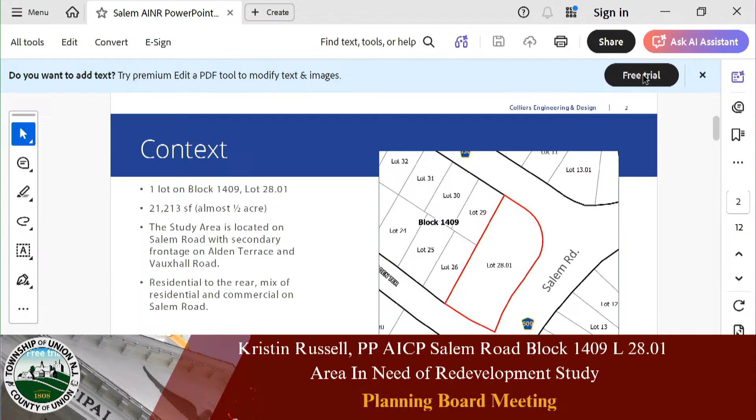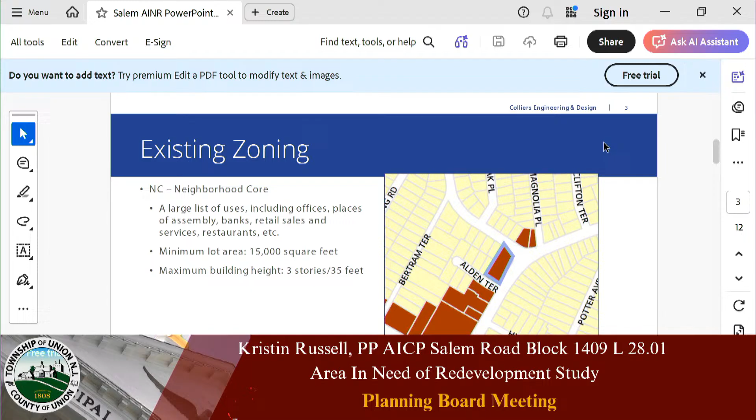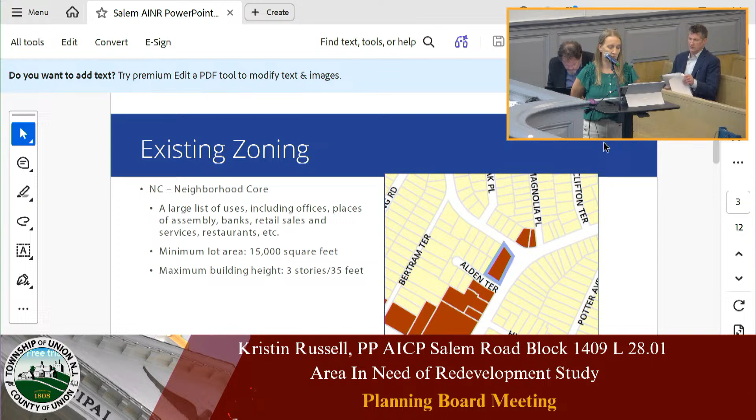The current zoning on the site is NC, Neighborhood Core, which allows an extensive list of commercial uses, including retail sales and services, restaurants, and the like. The minimum lot size in the NC zone is 15,000 square feet, and the maximum building height is 3 stories and 35 feet.

Once upon a time, the site had a gas station on it, and quite some time ago it was determined to be a known contaminated site. It did go through remediation, so it is safe for many uses. However, depending on what a future use might be, it may need continued remediation. For example, I wouldn't be surprised if a residential use needed more remediation, but that's up to the property owner at a future date. It is generally safe at this point in time.

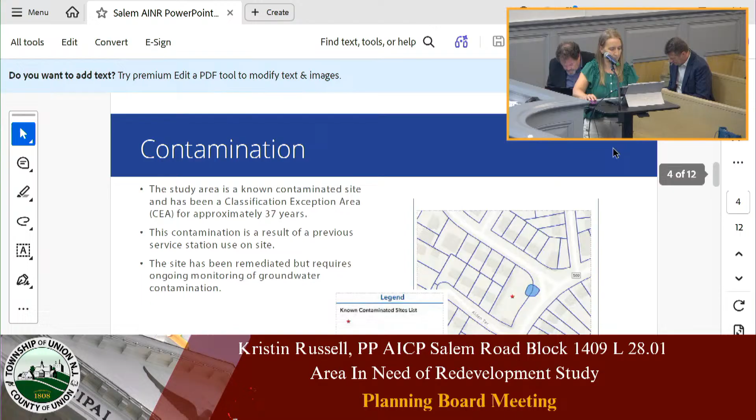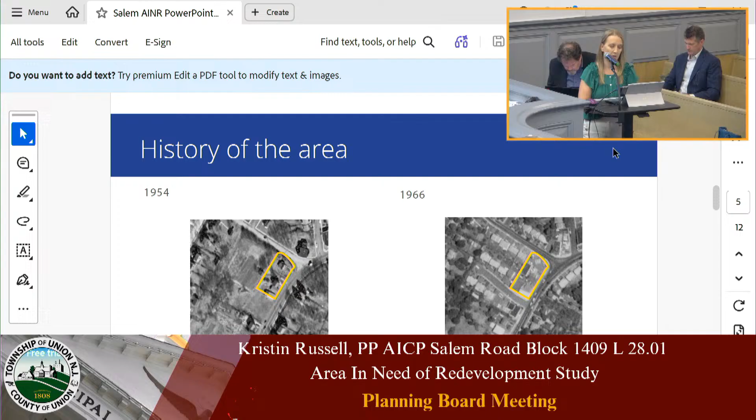Just some pictures to rather quickly go through the history of the area. Now that I'm looking at them on the screen, I hope that you can even see them. But what it shows is, even as early as 1954, there was development on that site in the form of several buildings. It was never just one big building occupying the site or one building and a parking lot; it was very often multiple structures. That makes sense with the former gas station use I mentioned. There would have probably been a garage use and a canopy for the fuel tanks and such. So as early as 1954, we find images to that effect, and that continues through pretty much through the present.

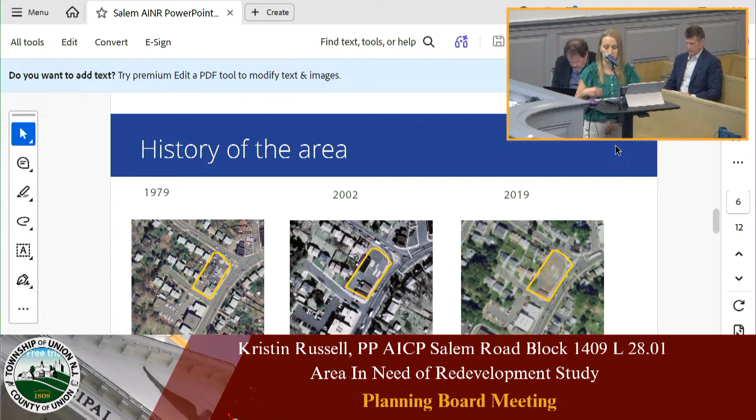You can see in 2019, that's the first image I found where the majority of the site is demolished, and that's how we would find it today. The majority of the site is just a gravel, vacant parking area — I wouldn't even call it a parking area, it's just a gravel, vacant, broken up asphalt type of site. Though at the southern side of the site, we do have a one-story building that also is vacant. There has not been a tenant in there for some time.

So just to run over the Local Redevelopment and Housing Law that you're all familiar with, there are a series of criteria that any site must meet one or several of in order to be qualified as an area in need of redevelopment. And I should have mentioned this at the top, this is a non-condemnation area in need study. So should the governing body choose to adopt this as a redevelopment area, they would not have the power of eminent domain.

So this site that I'm looking at, I compared it to all of the criteria that are available, and those that it qualified under are A, B, and D. A, in short, is substandard, unsafe, unsanitary, dilapidated, and obsolete buildings. B is buildings that were previously used for commercial, that have been abandoned for at least 2 consecutive years. And D, areas where the buildings or improvements are detrimental to the health, safety, and welfare of the community.

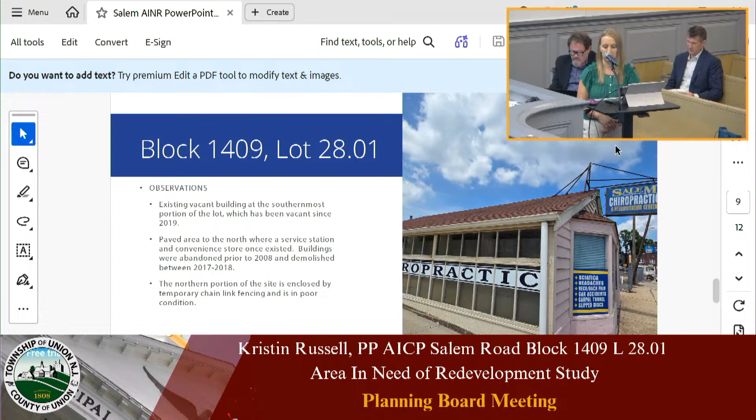So as I said, this is one lot. Here you can see a photograph of the building that's on the south side of the site. It's an existing building. It's been vacant since 2019, as far as I can find in the records. The paved area on the north side of the site was abandoned at some point prior to 2008 and demolished between 2017 and 2018. The northern portion of the site is enclosed by a temporary chain link fence that is in poor condition.

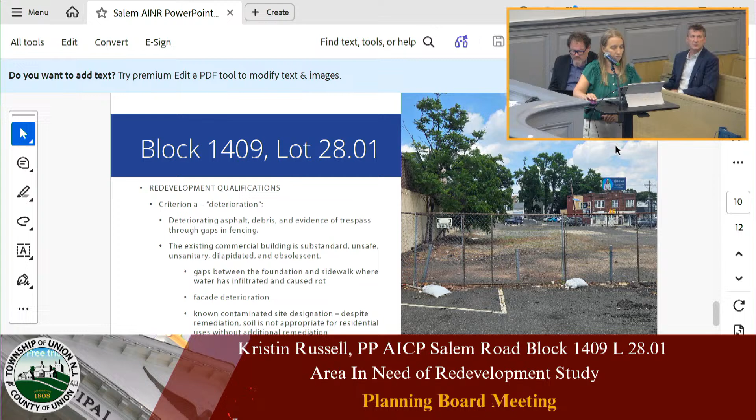Criterion B is where we look at the vacant and abandoned buildings. So this would not apply to the parking lot area of the site, but the remaining building on the property has been vacant since, as I said, at least 2019. We only need to show 2 years, so we are well within that range. And the building sitting there vacant has fallen into a state of disrepair and it would be untenable at this point.

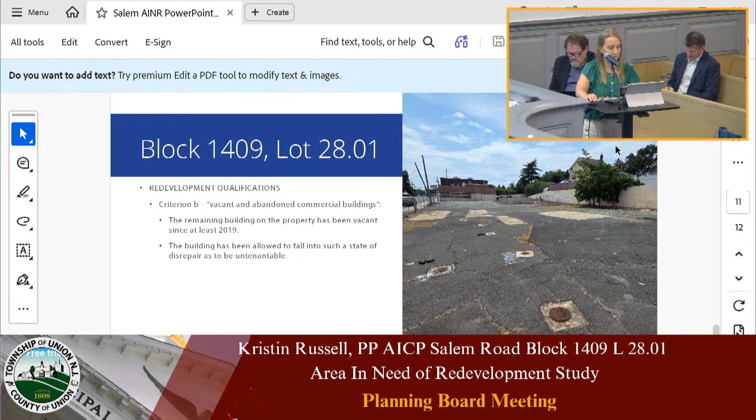Finally, criterion D is the obsolete layout and design. The side street that runs adjacent to that building has a slight grade, which doesn't seem like a lot until you look at it against the facade of that building and you realize that the building is consequently partially sunken into the grade. It's just not an ideal situation. So when the pedestrian is walking up the sidewalk, the windows are almost below them. It's pretty awkward. It wouldn't be an ideal situation for any business to be in there.

The existing zoning limits impervious coverage to 80%, and this site has 100% coverage. The corner location, 2 corners actually, is highly visible, and the existing conditions are an eyesore and detriment to the morals, economy, and vibrancy of the community. That would be a great block front to see some activity on, to see revitalization that would uplift that entire corridor. The building and the site present safety hazards, as I said, deteriorating

Deteriorating asphalt, deteriorating facade, and the site's existing limitations have caused the decay of the block front, which impacts the broader community. So I've listed 3 criteria that this site, I believe, qualifies for under the local redevelopment and housing law. You only need 1. So 3 gives us really an extra boost in confidence that this site would qualify.

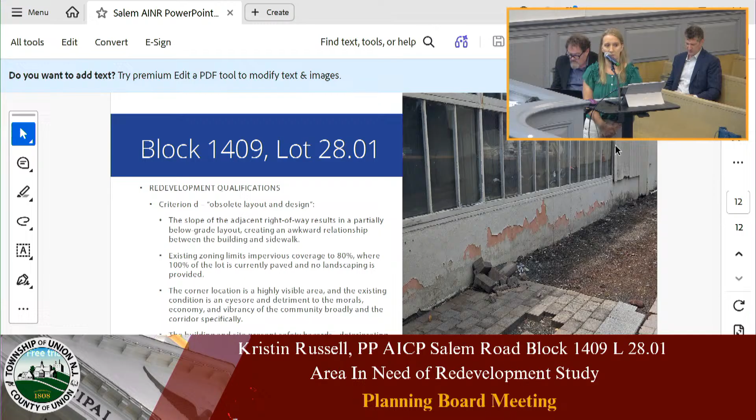I'd like to take any questions about the site, but just as a reminder, the next steps in this process would be to send a recommendation to the Township Committee, and they would then, if they agree with you, adopt a resolution determining that this is an area in need of redevelopment. And then at some point in the future, a redevelopment plan could be written for this site.

Thank you. Questions from the board? Questions from the public? Okay. Comments from the board, if there's any comments? Comments from the public?

Okay, with that, can I get a motion to concur with the findings and recommendations of the study and refer this back to the Township Committee for further action? So moved. Moved by Mr. Cohan. Is there a second? Second. Seconded by Mrs. Perkins. Roll call, please.

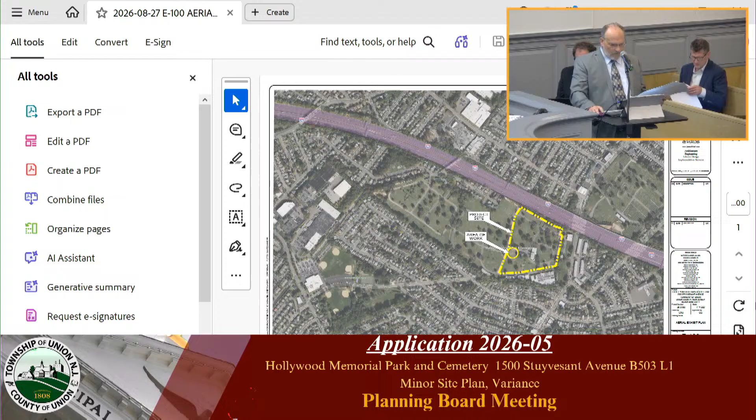Let's see, I am going to switch to second exhibit. Oops, that's not it. Apologize. There it is. Again.

Okay, this would be the second exhibit, dated August 27th, 2026, drawing E200, simply titled Site Exhibit Plan. It's basically a color version of our site plans, and it also includes the zoning table on it.

The applicant is proposing an 8,160 square foot mausoleum building, represented by the tan color on the exhibit. The mausoleum building is encompassed by a walkway, and the roof overhangs, with columns along the edge of the walkway so the roof covers that walkway. The total roof area is 10,223 square feet.

I'm going to go to the rendering. Is that exhibit A2? A2, yes. Thank you, counsel. Just to talk a little about the building itself. I don't know, Steve, if this was part of the package submitted. Why don't we mark that as A3? Okay, yeah, this is a colored rendering of the proposed mausoleum.

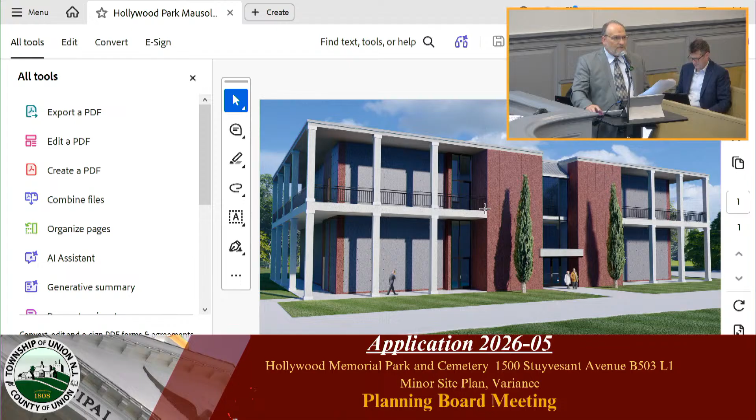The building will be constructed of reinforced concrete, with granite on the exterior and marble interior. It will have heat and air conditioning and is also equipped with an elevator. This mausoleum will accommodate 2,572 crypts. So just going back to Exhibit A2.

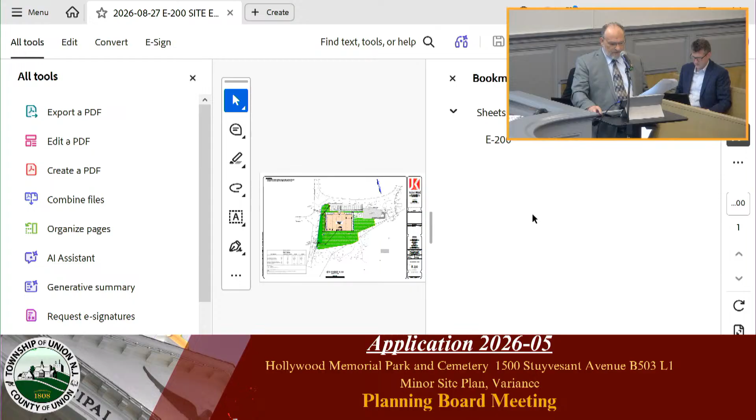There it is. Some additional site work, ancillary work in addition to the building. There's going to be 10 parking spaces constructed in front off the existing circulation road, asphalt paved parking spaces. There'll be some site grading, minimal landscaping, a few trees are proposed. The building will require new utility services, and we're also proposing a stormwater management system, which is to the west of the proposed building.

Staying on the stormwater, this site, under the newest New Jersey rules and regulations for stormwater management, falls into the category of a major stormwater development simply because we are introducing more than 1/4 of an acre of new impervious area. That kicks us into having to address water quantity, water quality, and groundwater recharge.

For water quantity, for a major development, we have to compare existing peak flows from our area of disturbance and provide a system that can attenuate those flows so that the developed peak flows are 50%, 75%, or 80% of the 2, 10, and 100-year storm values, respectively, for the existing conditions peak flow.

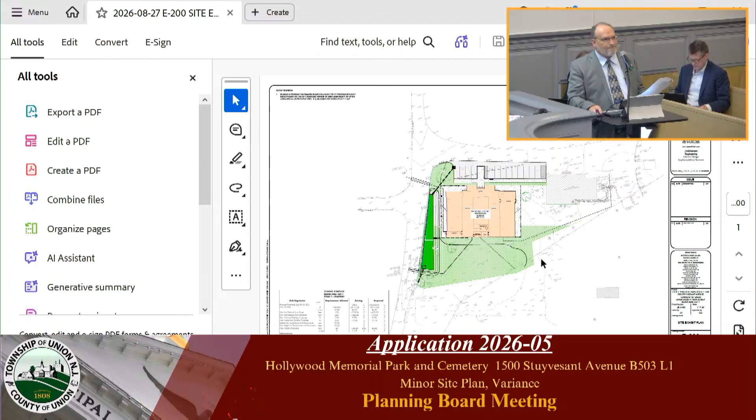You've had an opportunity to review the August 11, 2026 letter from Colliers. Can you confirm you don't have any concerns or issues with the items raised? Yes, we had that letter. The plans we resubmitted address all the technical items. There are some administrative items, such as cost estimates and a couple of outside agency approvals, which we'll obtain should the board vote favorably on this application.

Thank you very much. Mr. Chairman, I have no further questions of Mr. Cesario. Questions from the board?

Is that a sprinklered building? We can confirm, if it's required, it certainly will be. I don't believe it is, but I'm not 100% sure. I've been in those buildings so many times, I'm trying to remember if I looked up at the ceiling. Again, if required, it certainly will have it. Doctor, just a question or remark.

In the technical comments, item 6 talks about the recommended 4-inch sewer line to the new building to avoid the 90-degree turns, as a recommendation. Yes, the current plans before the board address that. We believe we've taken care of all the technical comments, but I defer to the board's professionals.

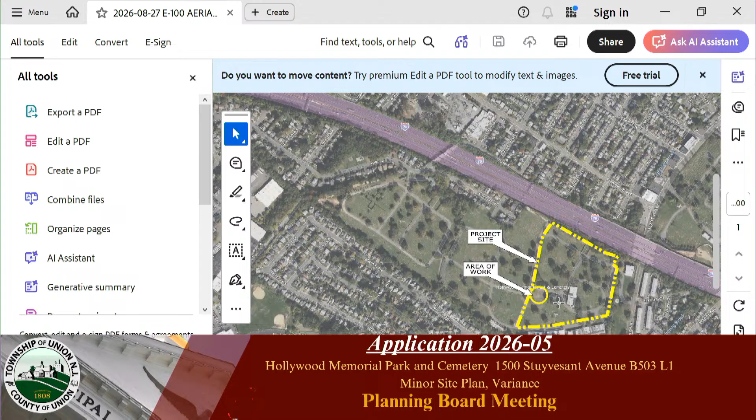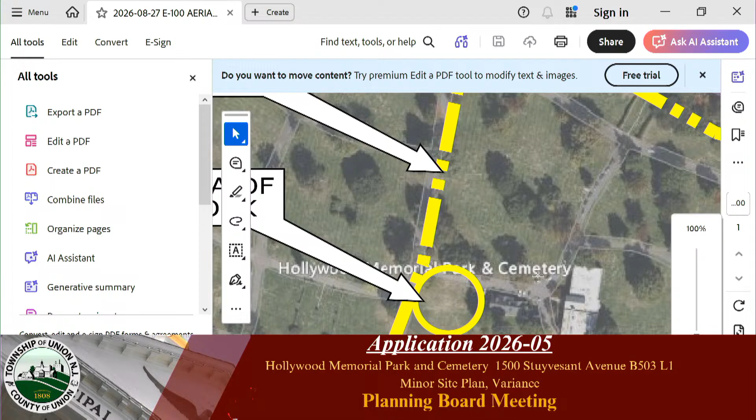Where is the existing parking in relationship to the buildings? It seems like there should be a site plan showing everything, but it doesn't look like you have that right now, so that's okay. Let's go to the survey instead.

This square represents where the new building is going, and this is the existing building just to the right. Oh okay, now that's helpful.

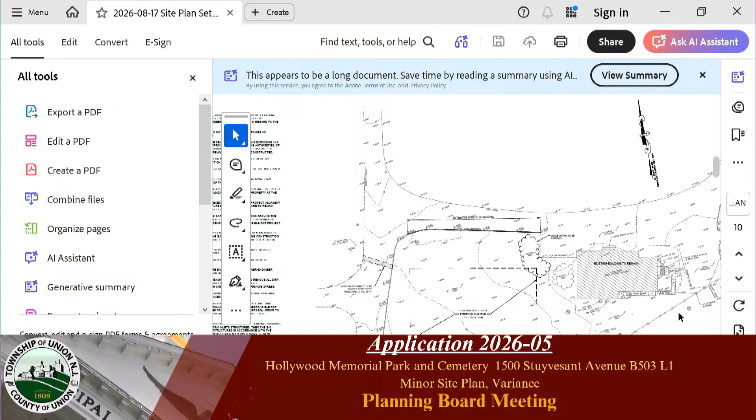Where is the site entry? To the east, off Stuyvesant Avenue. Oh, Stuyvesant, okay. That kind of answers my question a little bit.

Could you bring up the rendering briefly? Sure. I was talking about the three-dimensional rendering. Oh, the exterior of the building, architect... I'm sorry.

You said the materials were a concrete building with granite, I would imagine the red areas are the granite? That is my understanding. Just for clarity, I am not the architect on the project.

Understood. It looks like the bottom massing is higher than the upper massing? I would have to look at the elevation. Okay, alright, so I'm not going to ask any more architectural questions, that's fine.

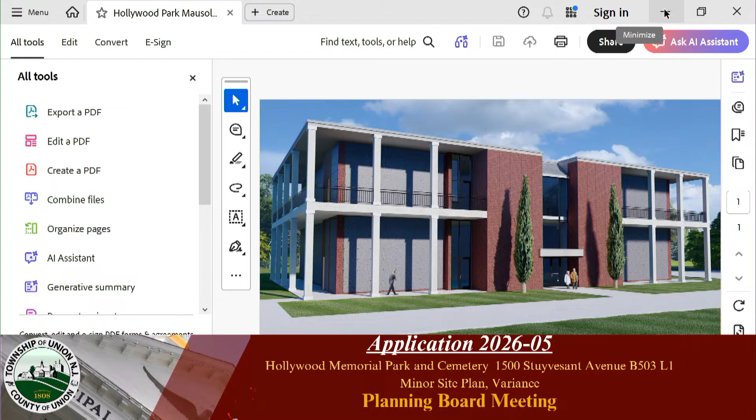The last one is, what are the parking requirements in relationship to what you're providing? We did not see parking requirements specific to mausoleums, so it's kind of based on what the operator said.

I find myself, unfortunately, when I've had to go there, parking in the roadway. The entryway roadway is a little bit challenging. That might be something you want to look at, for convenience, not necessarily a requirement, but that's it. Okay, great, thanks, thank you.

Any further questions from the public? Okay, Mr. Hale? Yes, thanks Chair. I'd now like to call upon Robert Hudak, our professional planner.

Mr. Hudak, raise your right hand. Do you swear the testimony you're about to give is the truth, the whole truth, and nothing but the truth? I do. Please spell your last name for the record. Robert, last name Hudak, H-U-D as in David, A-K. I'm a licensed professional planner, my licenses are all in order. I have been before this board before and accepted as a witness, but if you want to go through my CV, we certainly can. Board stipulates. Okay great, thank you very much.

Mr. Hudak, based upon our submission, this is a permitted use in the zone, and we're seeking a C variance for the height. If you could please provide the planning justification for that relief.

Sure. As the board's aware, but for the edification of the public, variances can be granted under two standards. The first is the C1 hardship standard, where relief may be granted due to exceptional narrowness, shallowness, shape, or topographical feature uniquely affecting the property, creating practical difficulties in complying with the ordinance. There's also the C2, the flexible C standard, where relief may be granted where the purposes of the Municipal Land Use Law would be advanced, where benefits substantially outweigh detriments, and where the project offers a better zoning alternative.

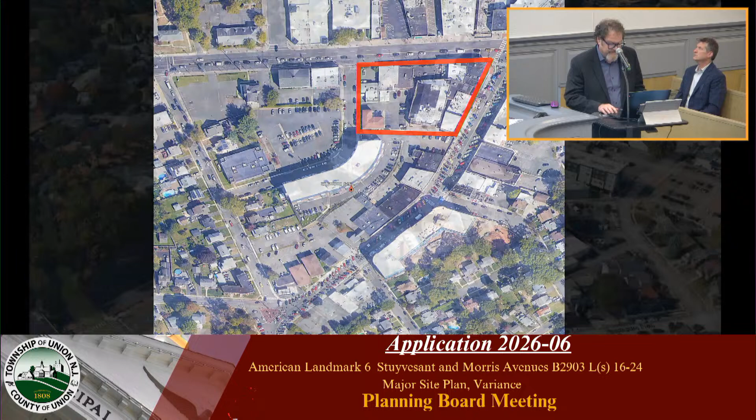This is a Google Earth view of the site. This shows the project as it's been constructed so far. It also shows something very unique in this image: how Morris Avenue necks down as you head west. It's wider in front of Town Hall, and then it narrows at Stuyvesant Avenue, creating a very interesting perspective. As people come into town on Morris Avenue approaching the intersection of Stuyvesant, you can see clearly this site projects into the visual corridor of Morris Avenue. So, no pun intended, we think this is a landmark site.

We began working on this project in 2022, and we first studied a lot of different development options. In our early meetings with the developer and the town, it became apparent that this site was very special because of its town center location and the condition I just explained. We thought this would create a great location for destinations for shopping, restaurants, and public gathering spaces. When we looked at it, a traditional development pattern of a full block development on this site wouldn't be the best use of this location.

This is one of the early concept studies that we talked about with the town professionals and with our team. This study shows that by pulling back the building from Stuyvesant Avenue and from Morris Avenue, we could create a public space at the intersection, so that public space could become the primary focus of this project.

We also looked at it, and the developer modified their Phase 4 building so that it now turns to front on the plaza space. We thought that was very important. One of the great things about European plazas, and plazas in general, is when they're held together by the architecture of the buildings around them. So by turning the Phase 4 building and creating a front on this plaza, it captures the space and also hides the parking located behind the Phase 4 building.

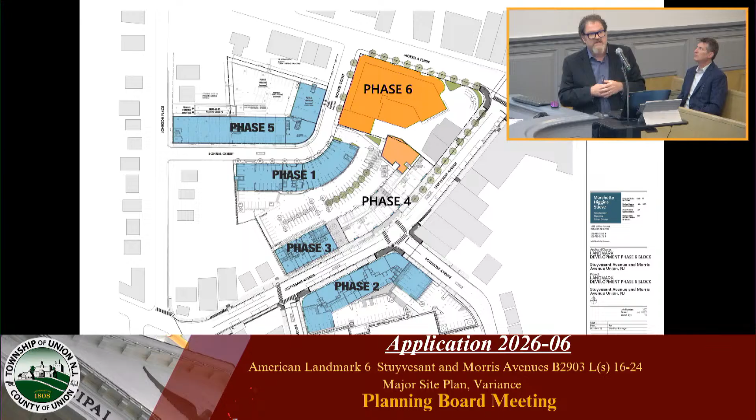It also creates a very unique opportunity to allow pedestrians to funnel through the plaza space and through a newly generated mews that leads directly to the public parking facility created in the Phase 5 building. So now people who park in the Phase 5 project can walk through the mews and actually enter into the plaza space.

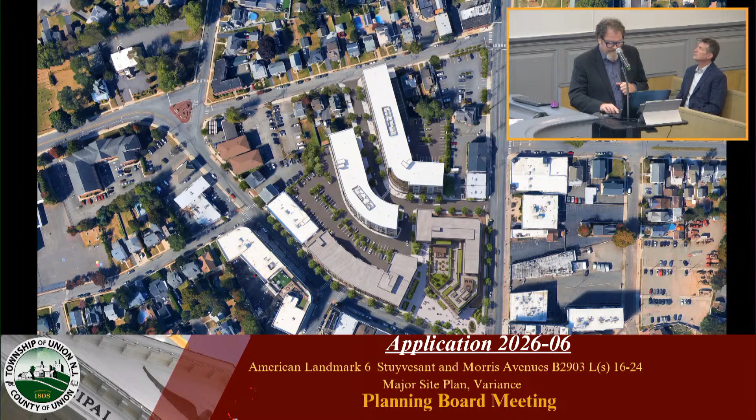This is a rendered image of the intersection of Stuyvesant and Morris Avenue. This shows the plaza in front of the building. It shows the building form, how it's turned and creates a frontage on the plaza, and then the Phase 6 building in the foreground.

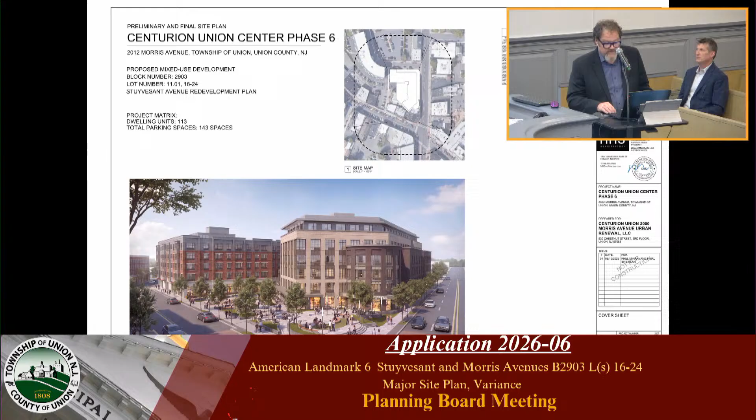Tonight we're seeking preliminary and final site plan approval for the Phase 6 project. The project is located in the Stuyvesant Avenue redevelopment plan, and it has been designed to comply with the requirements of this plan. We're seeking a few minor deviations or waivers, which we'll discuss as we move through the testimony. As was mentioned, the project will contain 113 residential units, 143 parking spaces, 10,000 square feet of retail space, and over 24,000 square feet of open space.

The project will have, as I mentioned, 143 parking spaces. Some of those will be located in a basement level of parking. In working through the design of the building, we made great efforts to hold the excavation of the basement back from the street frontages so that we could ensure we weren't excavating right up to the sidewalks with deep excavations.

In the parking breakdown, there are 113 parking spaces required by the redevelopment plan, and we're providing 143 parking spaces. 51 of those are going to be located on the basement level, 40 are located on the ground floor, and 52 will be located on a second floor.

We do have 24 compact spaces, and we are asking for a waiver for these compact spaces. These compact spaces measure 7.5 by 16 feet. It is my experience in many multifamily residential buildings that a percentage of compact spaces are adequate and service smaller vehicles. All of the parking spaces in this project are going to be assigned, so tenants will be assigned a parking spot, and building management will be sure that compact spaces get assigned to people with compact cars.

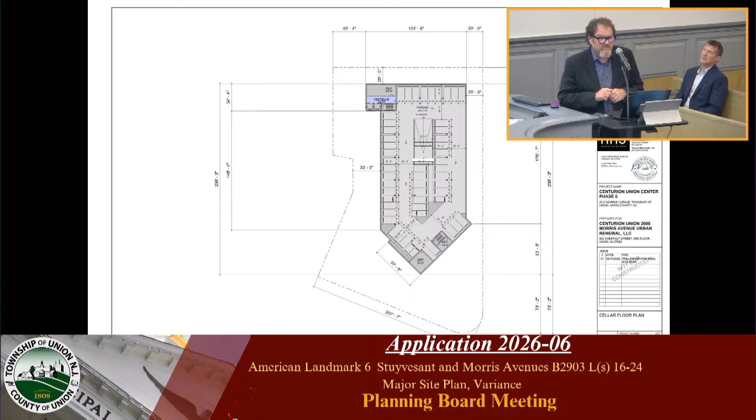15% of the parking spaces in the parking garage are also required to be EV charging spaces. This is a requirement by the state. We received a review letter from your fire department, and they requested that if the parking spaces were to be located in the building, we would need to provide a more robust sprinkler system, and that we should make an effort to have all of the parking spaces located on the ground floor, as near to the garage access as possible, and we would be able to accommodate that.

We made sure, and you'll see in the elevation portion of the building, that the parking is treated just the same as the rest of the building, so it will be indistinguishable from the residential and retail portions of the building.

There is a trash and move-in location, and a loading zone that we're proposing in front of the building on Bonnell Court. Trash will be collected inside the building and stored inside the building, and will be brought out on collection days by building management. It'll be picked up by a private hauler and taken away, so there won't be any trash stored on the street. It'll all be contained inside the building.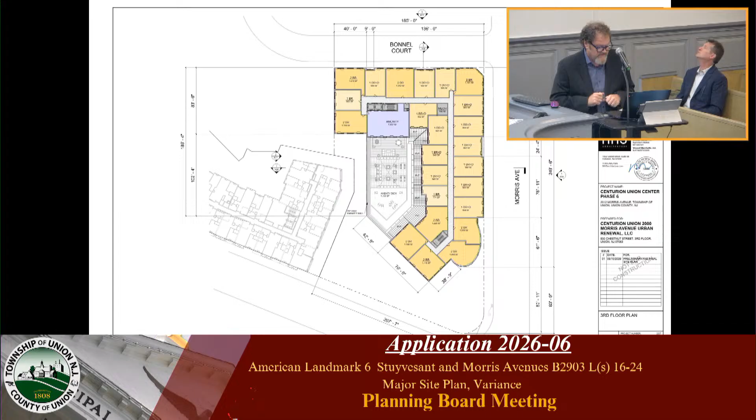The entire building is also going to be sprinklered, with an NFPA 13 sprinkler system. We've worked on a few other projects in Union, and all of those projects also have these types of facilities.

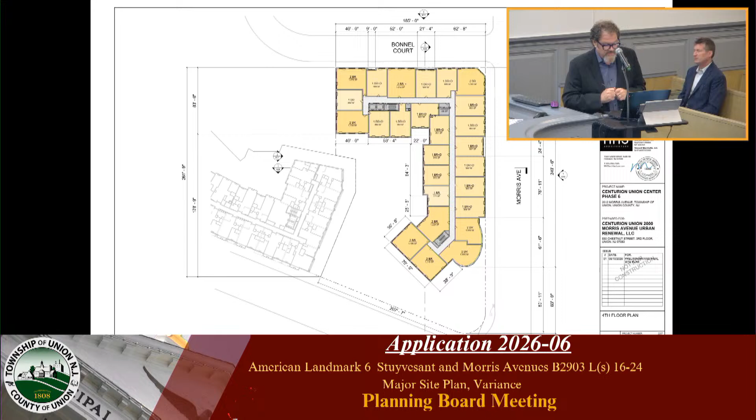This is the third floor plan again. I just show this to show how the units are located both front and back of the hallway. They face the street frontage as well as the plaza space. We meet all of the life safety requirements with regard to egress, and we have mechanical spaces on each floor off the corridor spaces.

As the building gets taller, there are significant step backs, prescribed in the redevelopment plan. At this floor level, there's a 12-foot setback along Morris Avenue and a 12-foot setback for the majority of Bonnel Court. This helps adjust the building height to the scale of the neighboring properties. At the sixth floor, there's an additional setback along Morris Avenue and Bonnel of 6 additional feet.

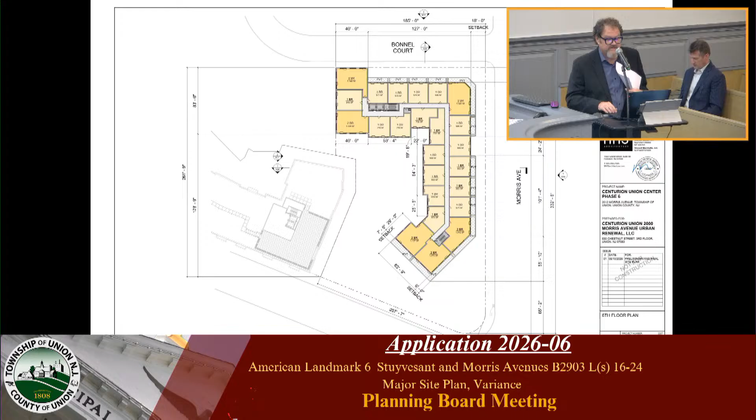Another waiver that we're going to be requesting is in the amount of green roof. The area provided on the green roof that we are showing right now is approximately 1,500 square feet of roof area.

It doesn't meet the minimum standards of the redevelopment plan.

However, this building is also going to be providing a series of other green features. The building will be using all low-flow plumbing fixtures. It will contain LED lights, energy-saving LED light fixtures, Energy Star rated appliances. It will be using low VOC paints and finishes, and locally sourced materials that contain higher recycling content.

In addition, there's a significant stormwater system that's being proposed, and we're providing a very significant amount of landscaping in the public plaza space, and you'll see that again when our landscape architect does his testimony.

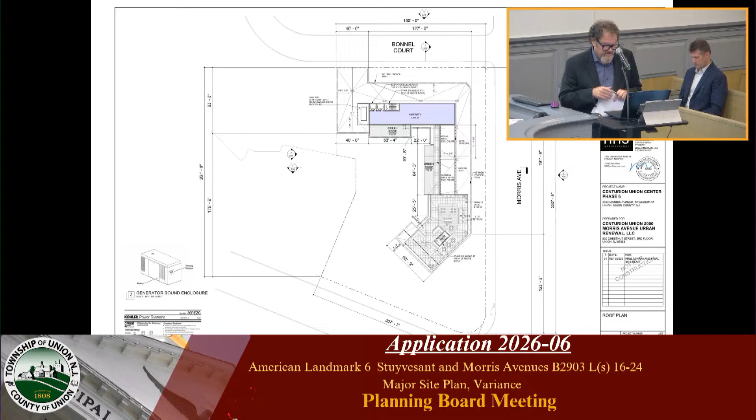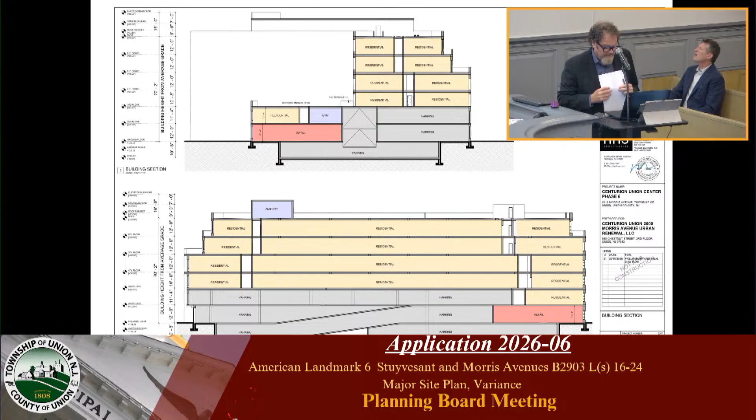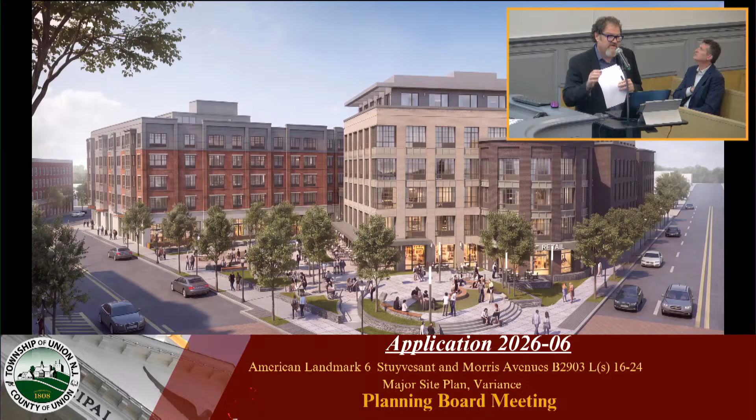So this is, again, the rendered building facade. I show that so you can see those step backs along Morris Avenue. These are the building elevations.

So the redevelopment plan has very robust design standards that we're required to follow. This project has been designed to comply with all of the design standards set forth in the redevelopment plan. It meets the required floor-to-floor heights and the facade material requirements by providing a variety of materials and openings across the facade.

The parking facades have been designed to blend with the residential portion of the building. The building has been designed to break up in massing using visual breaks both vertically and horizontally. It has a base, a middle, and a top. It meets the transparency requirements of the redevelopment plan at the base and the top of the building, and all of the entry points have been highlighted to stand out on the building facades.

The primary building facade materials are masonry, brick. There are two colors of brick being proposed. There'll be a panel system at the top of the building, so the materials get lighter as you go up.

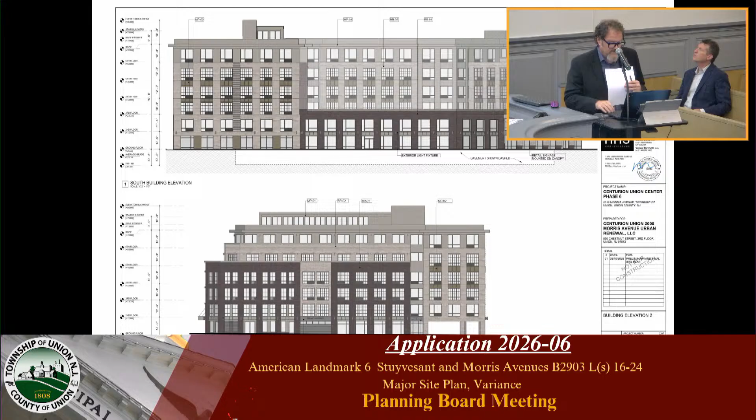The real intent of the signage is that it be consistent across the building. We want it to create a harmonious environment. It'll be pin-mounted channel letters that will be backlit or halo lit. There won't be any internally illuminated signage. Again, the intention is that it be a uniform sign package for the entire project.

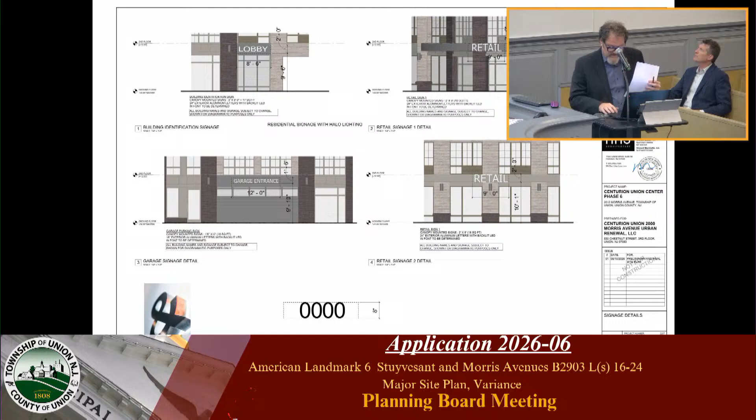And that concludes my testimony.

Well, great job, Mr. Stevie. No further questions at this time, Mr. Chairman? Questions from the board? Dr. Cowley?

So on the Morris Avenue side, the EV parking would be located in that side? It would be located on the ground floor plan.

If I can, I'll just quickly go back. We diagrammed before we had the fire department memo. We had the EV spaces broadcast throughout the building. We would revise our plan to show all of the parking for the EV on the ground floor level as close to the entrance to the garage as possible. I think that's a request we often get now about EV charging stations.

So because the parking lot area looks like the residential area, it seems almost closed off.

What would that look like in order to make it not a first floor closed off indoor environment?

Sure. So we're proposing to put a window system in, similar to the retail windows that we're putting in across the base of the building. One of the requirements of the redevelopment plan is if we're going to have parking that's exposed, it needs to be treated exactly the same way as the rest of the building. So there'll be a window system installed. The windows would probably have a tint to them, so you can't see the vehicles, but it'll appear as if that's a continuation of the storefront from the plaza space.

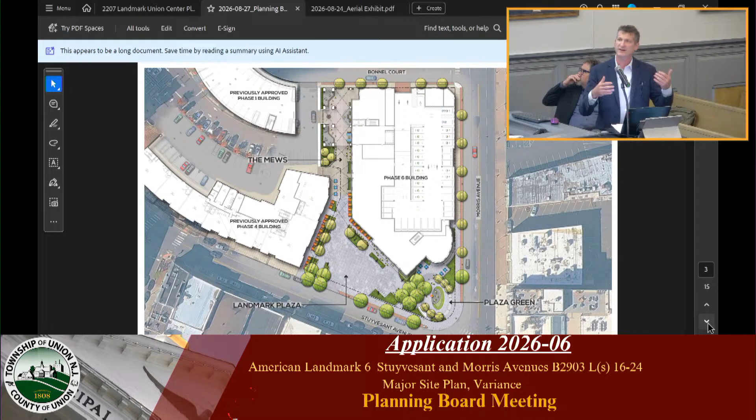All the trees are located to respect the proposed existing streetlights, and central to the project, and really the heart of this Phase 6 is the plaza itself. We've designed it as a singular space, but also creating some sub areas within there. At the intersection of Morris and Stuyvesant, there's the plaza green, a more lush planted area, and then we have the landmark plaza, which is a bit more open, creating the ability to be more flexible and provide opportunities for special events that the public will really be able to enjoy. We also have a retail frontage, a 10-foot zone off of the building facade in keeping with the redevelopment plan designated for that retail area, and then the Mews as it makes its way back to the parking garage and to Bonnel Court.

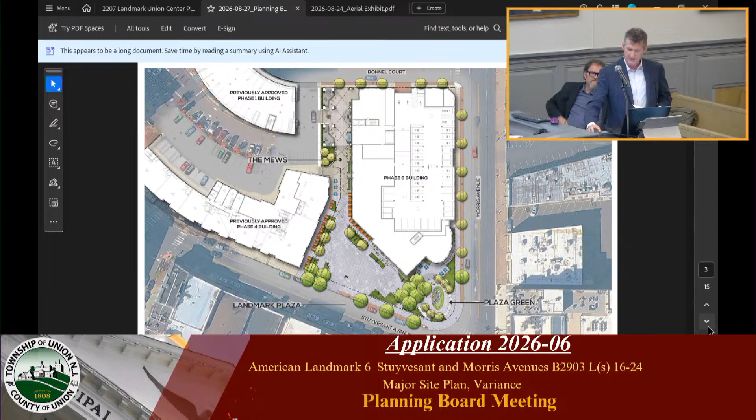I'm going to move to the next exhibit, which is the one plan I'll share this evening that is actually one of the submitted plans within the August 10th, 2026 landscape plan set. This is a compliance plan that shows the various aspects within the redevelopment plan and how we are complying with them from a landscape perspective.

The first item is the street tree placing. Along Bonnel, the requirement along Bonnel Court is for the trees to be planted 30 foot on center, and we are proposing that. That rhythm moves along and is flanked on either side of the parking garage entry, where naturally a tree cannot be located. There is also a requirement to have 1 lineal foot of seating for every 30 square foot within the plaza, so the recommendation for that would be...

666 lineal feet of seating area, and we're exceeding that with 697 lineal feet. This graphic shows how we've highlighted areas in yellow and orange — those are all of the proposed seating elements towards that requirement. You'll note that along the retail frontage, we show cafe seating that would really be by the tenant of the establishment within that retail use, and we're not utilizing any of that seating towards the requirement, so we meet the requirement as it would be for all public seating areas.

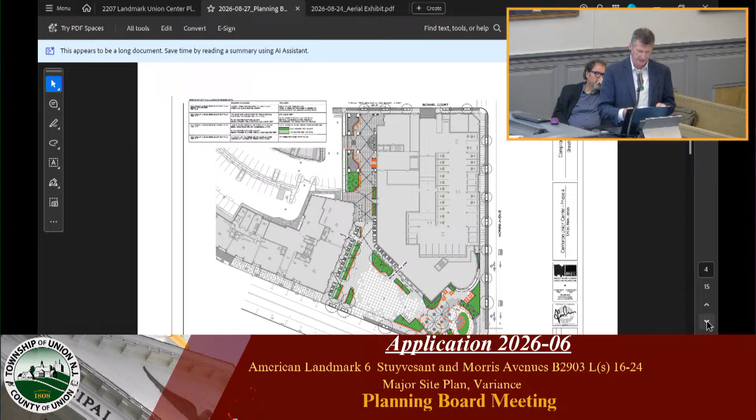Another requirement is that 20% of the plaza be planted, and we're exceeding that requirement with 4,346 square feet, identified within the 2 shades of green shown here. The last requirement we're tracking is to have a minimum of 18 trees within the plaza itself, and we're proposing 19 — again, that does not include any of the street trees along the 3 frontages.

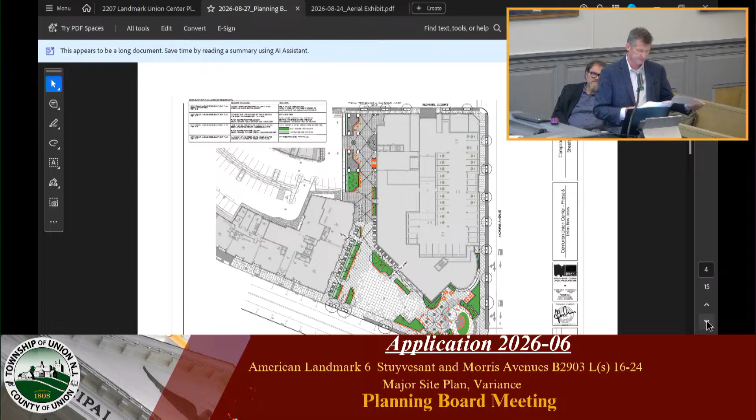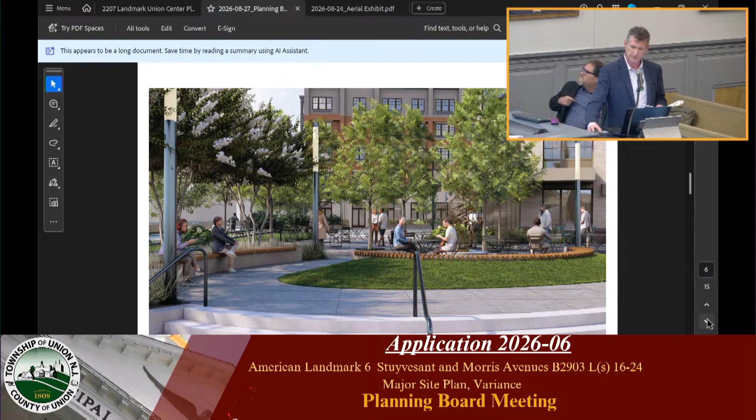Now our back is to Stuyvesant, and on the left side of the image is the previously approved building, where there is that retail zone, with some tables and chairs that would be per the retail tenant, a planter, and some trees, with cafe string lights as well for some ornamentation within that retail zone.

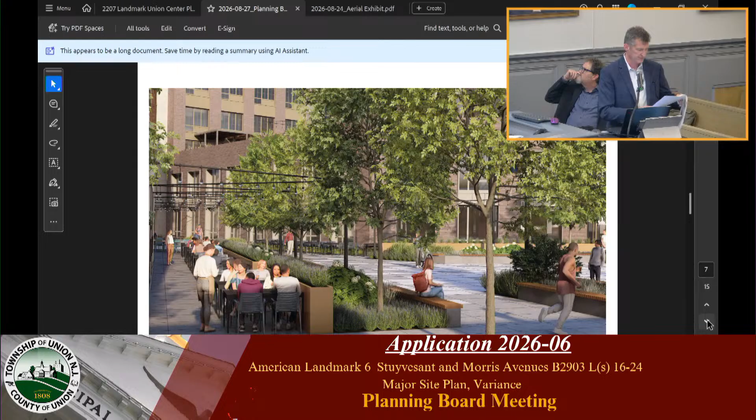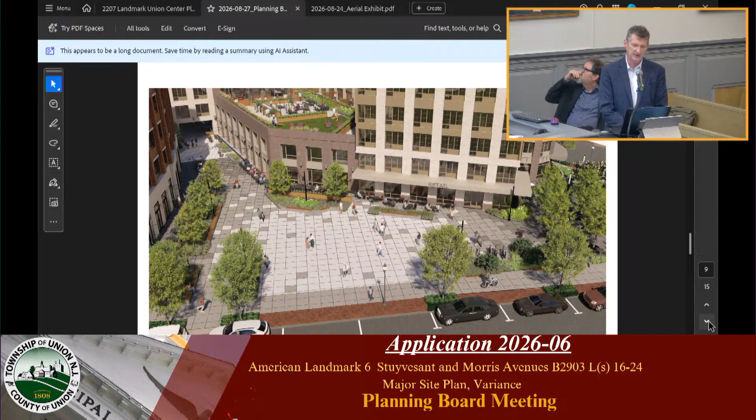This is a great view that I personally really like, looking down at the central space of the plaza. We have that Plaza Green off to the right-hand side, and then the retail zones creating those boundaries. We're also beginning to see the third floor retail and residential amenity space up top, but this plaza itself has been designed to be open so it can afford the opportunity for many different events.

This image shows how some of those events could happen. As Mr. Stevie indicated, in the upper left we're showing where the car show could be, where some of the best-in-class cars may be parked within the plaza. The center image could be for an evening concert, where a stage could be put up with approximately 200 chairs set out. Potentially a holiday market in the upper right, a farmer's market in the lower left, and potential for a food truck festival as well. So the plaza really offers some great opportunities for the public to enjoy this space.

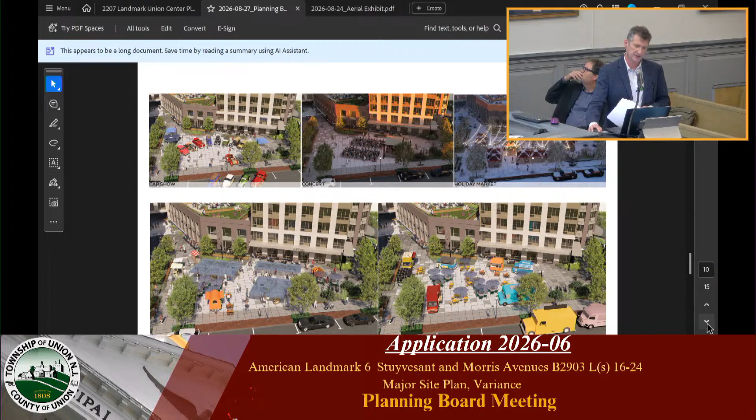Now I'm going back to a composite graphic where we show the plaza down below, the third floor rooftop amenity space, and overall the uppermost roof. So I'm going to take you now to that third floor, right off of that interior amenity space.

In the image in the upper right, our back is to that interior amenity club room, where we have a shade trellis creating some shade for table and chair seating. We have a fire pit in this area with lounge seating around it, two barbecue grills, and a synthetic lawn area that can be used for many different things, such as outdoor gaming like cornhole, as set up in the lower right-hand image.

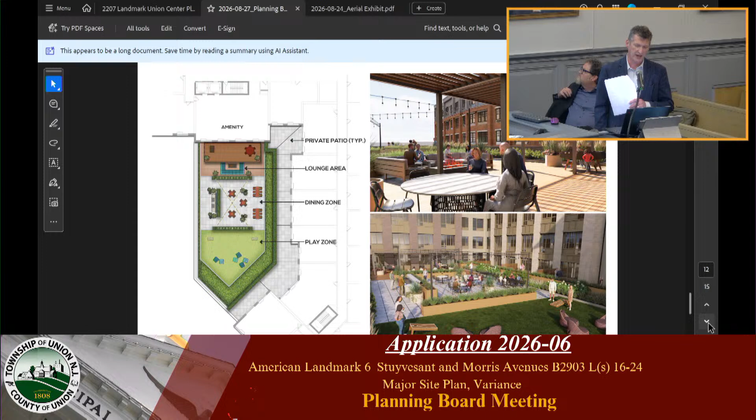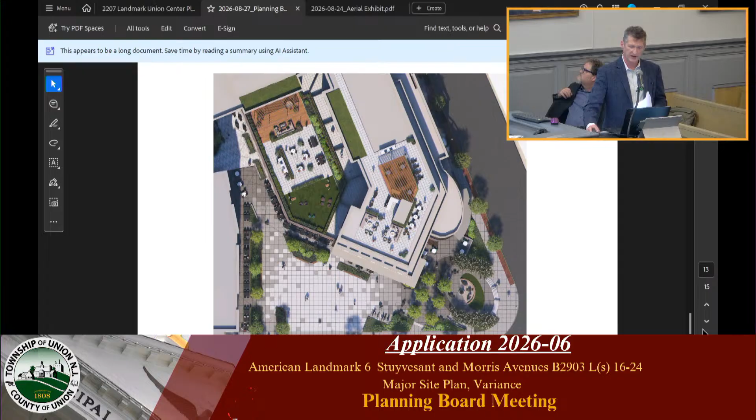That composite graphic again, just to orient you, we're moving up to the uppermost rooftop. On this rooftop we're proposing again a fire pit, two barbecue grills, a shade trellis up there as well, some lounge seating, and a counter with an outdoor TV located on that stair tower. This is accessed off of the interior amenity space toward the top of the plan, and this overlooks the plaza below.

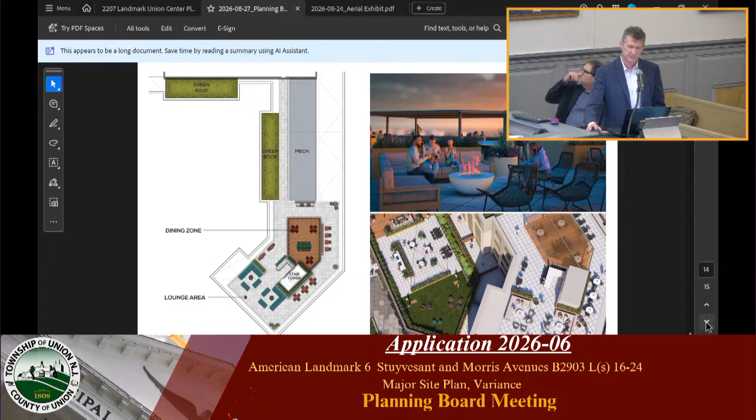This is the last image I have, and all the planting has been selected for sun and shade exposures. All of it would be irrigated, and as you heard from Mr. Stevie, the rooftop amenities, fire pit and barbecue grills, are all code compliant with countdown timers and such. That concludes my overview of the landscape improvements.

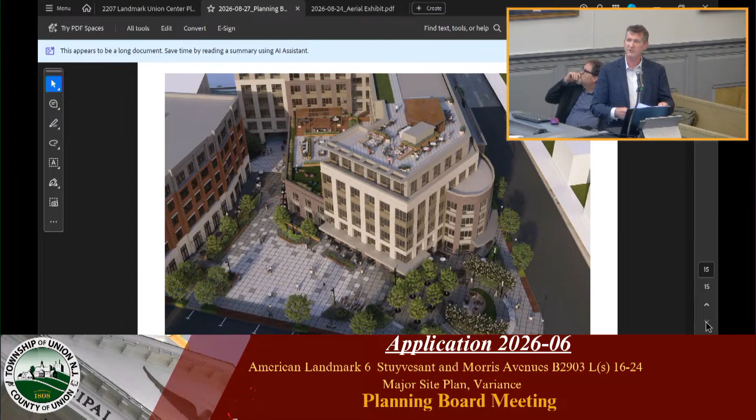Great job again there, Mr. Carmen. No further questions, Mr. Chairman. Okay, questions from the board?

Yes, sorry, I have a question. It seems to me that you mentioned there would be plantings on Bonnel Court. Now, Bonnel Court is kind of getting used as a lobby and a loading zone. Trash will be taken from there, and it's also the exit for all cars exiting the parking space. That's a busy spot, and it's not that wide.

On Bonnel, we have the required street trees. The redevelopment plan requires street trees planted 30 feet on center, which the 5 trees we're proposing here satisfy. You do see a wider gap where the entry to the garage is, but that's a requirement of the redevelopment plan. And that's the same area, if I recall, that will have a 12-foot setback. I don't recall the exact setback over there, but we do have adequate room for the tree planting as well as a sidewalk.

It'll be a busy spot. Mr. Gohan.

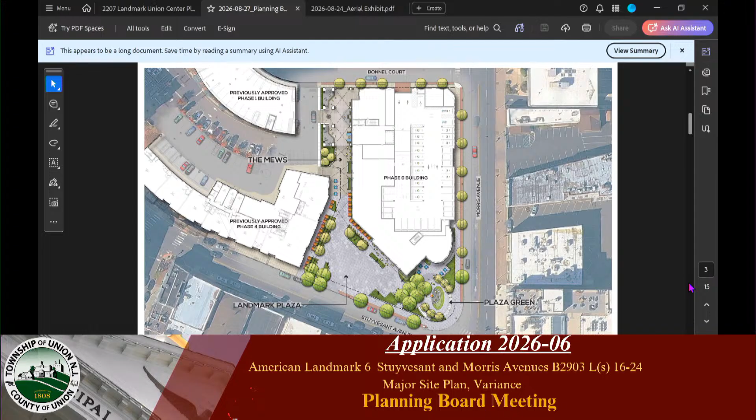Thank you. So I have some questions about the trees, one that just came to mind based upon what you said a moment ago. Is there anything relative to the choice of species or the maintenance plan that will mitigate sidewalk heaving over time from roots?

The tree species we've selected are native trees, and we've selected trees sized appropriately, including the columnar maple where there's a tighter sidewalk curb to building frontage. We've utilized these trees in other applications and they've worked well for us. We'd be happy to study it further to ensure, but we are comfortable with what we have currently proposed.

And then some other questions about the trees themselves: what's their expected maximum height at maturity? The columnar maple, this variety, could potentially get into the 35 to 40 foot range over a significant time, but they would be proposed to go in at about 14 feet.

And then what about the circumference of the crown of the trees? At 30 feet on center, is there any chance that they'll come together over time?

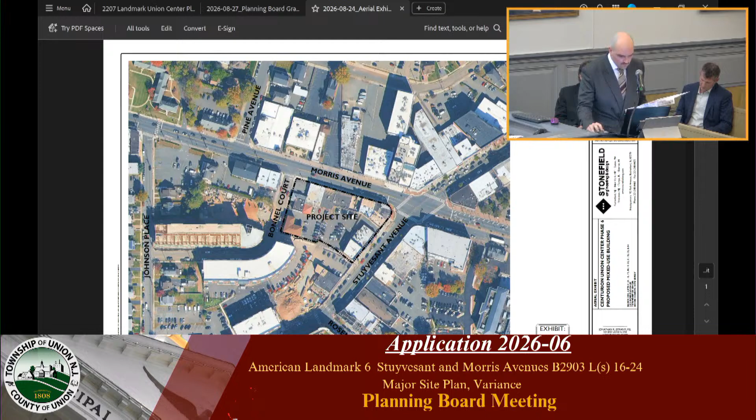Moving on to the submitted site plans. One second, I don't think I have them pulled up. Sorry about that. So these are the site plans dated 8/10/2026, and they were submitted as part of this application.

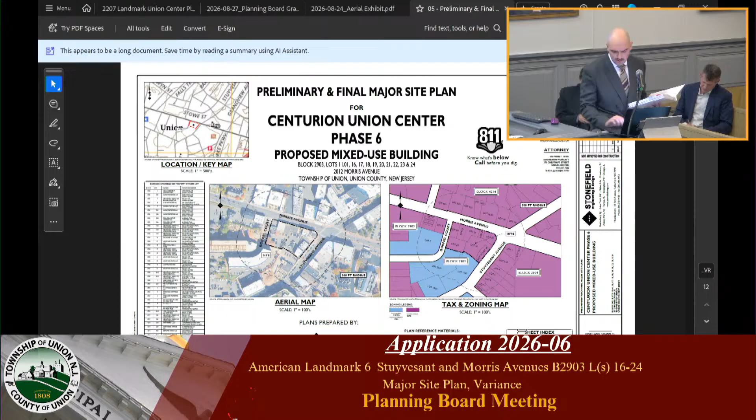To answer one question that was asked before, there are two hydrants on site that are going to remain. There's one on the corner of Morris Avenue and Stuyvesant, and there's a second on the corner of Morris and Bonnel. Both of those are intended to remain.

Moving on to the site, I'd like to note that the site is completely compliant with the bulk zoning with regards to setbacks, step backs, the building height, and the building coverage. The building coverage is 68.5%, where 75 is required. Bruce had mentioned the redevelopment plan does include a requirement for step backs on the buildings on the third and sixth floors, which were shown in the building elevations.

We already mentioned that there's a loading zone. You can see it located on the plan right here, in front of the lobby. I can zoom in if you need. It's 40 feet by 12 feet. That is intended for trash pickup, deliveries, Amazon deliveries, stuff like that, as well as building move in and move out. That space will be allocated by building management, so that loading space will be available while residents are moving.

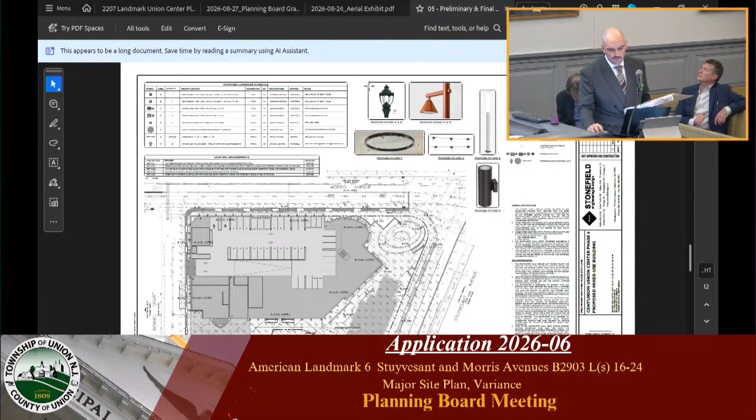You can see the proposed fixture A up here. That's just the typical acorn fixture you'll be seeing along the frontages. Like I mentioned, we'll swap that out with whatever fixture exactly matches the Morris, Union Township streetscapes. On site we have a series of string lights, decorative poles, and I'm not exactly sure how to describe this one, but it's like a ring light underneath this canopy area that kind of ties everything together.

The requirement for the average lighting in the plaza area is 2 foot candles, and we're exceeding that slightly by providing about 3.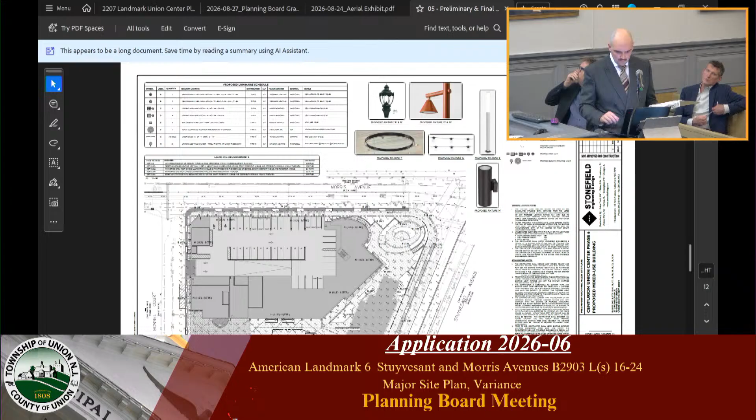Stormwater on site is provided via an infiltration basin located underneath the plaza. We do not at this time have infiltration rates, but we've designed the system to detain the full flow and comply with all NJDEP requirements. The site, due to its size over an acre, is considered a major development by the New Jersey Department of Environmental Protection, so we're required to comply with quantity, quality, and groundwater recharge.

Because we're in the metropolitan planning area, we're exempt from groundwater recharge. And because we're decreasing motor vehicle surface by over 20,000 square feet, we're also exempt from water quality. So we're complying with the water quantity requirement via this detention system, reducing the major storm events by 50, 75, and 80% for the 2, 10, and 100-year storms respectively.

Mr. Seavey mentioned the signage. While a full signage package has not been submitted, we're completely compliant, and we're complying with the streetscape requirements for the plaza.

I'd also like to note that the property line for block 11.01 runs through the plaza. Obviously it helps that Landmark is the developer for both, but we're working with that engineer to make sure these two spaces cohesively tie together and there are no issues with grading or anything like that between the two buildings.

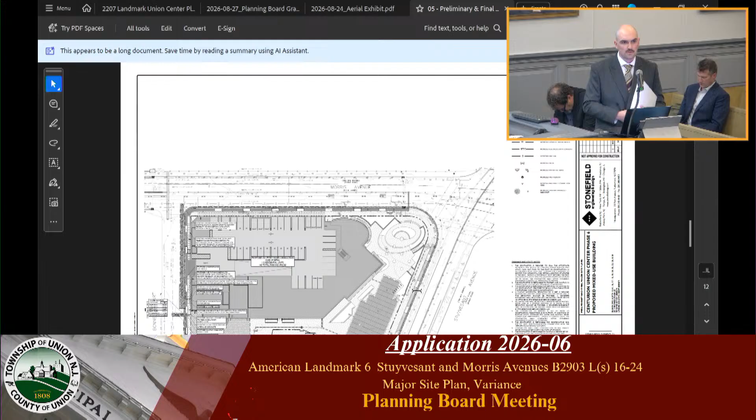All right, again, great job. Thank you, Mr. Donna. Mr. Chairman, no further questions. Okay, questions from the board? Mr. Cohan?

Thank you. I have a couple of questions, or one question and one comment, related to demolition of the existing buildings. Based upon prior phases of the project, some of that is going to take a little bit of time, a lot of heavy equipment, and it'll be very near a main thoroughfare in town, a busy state highway. Has there been any consideration given or discussion about implosion of the existing buildings to minimize the time frame? I don't know — I suspect there's a cost factor. That would be the decision of the applicant, but I wonder whether that might be a more efficient way to make certain the project moves along efficiently and minimizes the impact on traffic flow.

To my knowledge that hasn't been discussed, but we can work with the applicant and discuss that with the engineer.

And the comment is, I learned recently, to my surprise, that the building immediately on the corner of Morris and Stuyvesant Avenue, the Falls building, has some historical significance to the community. Before this building was built, that was the location of the public meetings of the township committee. I wonder whether the township or the developer might consider putting up some sort of commemorative plaque of acknowledgment for that, since it's of historical significance to the community. This is going to transform the town center in a very positive way, but we don't want to forget the past.

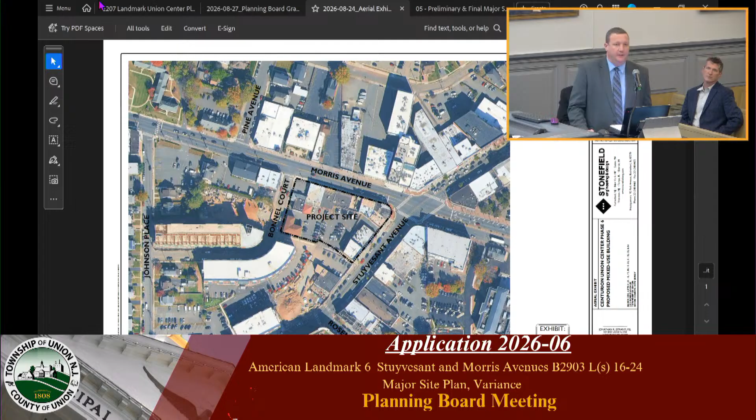And from a traffic standpoint, you've had an opportunity to review the Collier's letter. No issues with anything in there? No. Great, thank you. No further questions, Mr. Chairman. Questions from the board? Mr. Cohen?

Any other questions? I just had one question on the future level of service. I noticed that you mentioned Morris Bonnell, Johnson Bonnell, and Bonnell Court at the site driveway. As you're going down Bonnell, making a left onto Johnson, you're going to exit through either Stuyvesant or Elmwood.

Based on the trip generations that you've calculated, can you testify if future level of service would be affected for Elmwood or Stuyvesant as they're exiting from Johnson? The intersection to the south with the circle? By that point, you're already talking about a pretty minimal volume of traffic generated by 113 units. They're all going to be at Johnson Place because that's the only way out. So my comparative analysis there shows no impact.